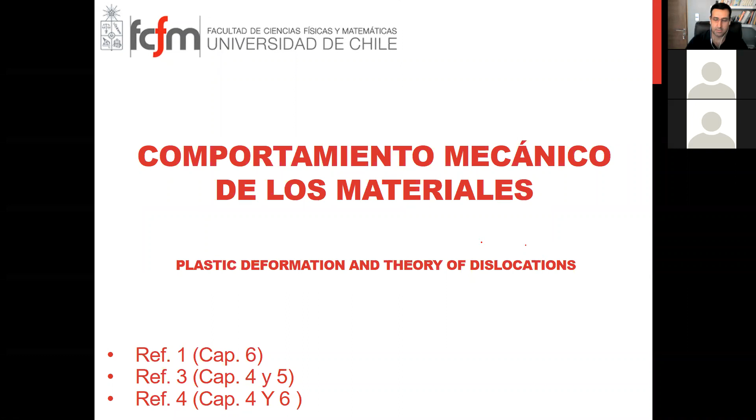In previous classes we talked about elastic behavior of materials, linear elasticity, viscoelasticity, ferroelasticity. We discussed reversible modes of deformation in materials that can be time dependent or time independent.

Today we start talking about irreversible deformations in materials, very easily seen in metallic materials and also in polymers. When we apply load to such materials, we deform them, and this deforming at low loads is elastic. After critical stress, which we call yield stress, materials start to deform plastically. It means after releasing or unloading the load, the deformation will not come back to the original. We know this as plastic deformation, and we want to study it in metallic materials today.

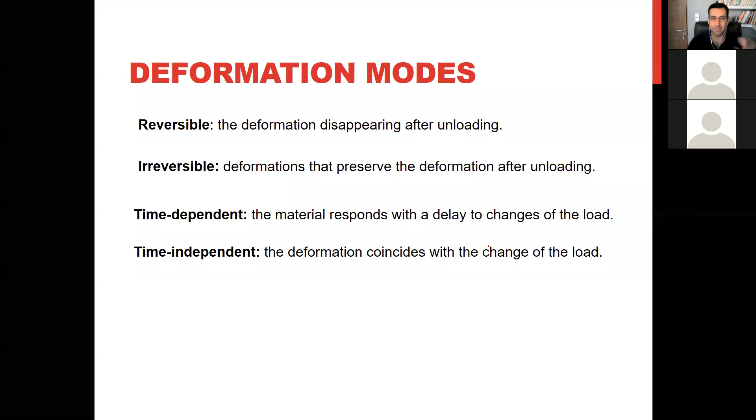What is the reason, and all the details from a microstructural point of view, why we have plastic deformation, and we see it in different aspects? Also, we have this plastic deformation in polymers, where we call it viscoplastic. Even we can see some plastic deformation in ceramic materials. These topics, or a little more about metallic materials, will continue in next classes after control one. So let's talk about plastic deformation in metallic materials today.

So we are focused on metallic materials. You already know well that metallic materials are crystals, and the majority are BCC, FCC, and HCP crystals.

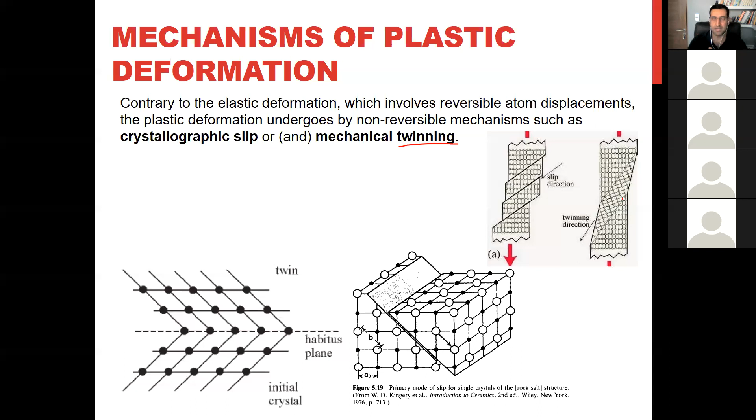First, let me explain. But twin doesn't have the same force orientation, right?

Look, for example, if you have a single crystal and you are applying load in this direction, if something like this happens, its mechanism is slip. If something like this happens, it means the mechanism is twinning, not slip. The mechanism is different.

Now I will explain what twinning is, and later in today's class we will talk more about slip. Let's briefly talk about twinning first, because it's a less important mechanism for plastic deformation, but since it happens, we have to be familiar with it.

If you apply load to a metal, you can activate both of these mechanisms. The slip is happening more frequently and more easily, so we see it more. But in some metals, like tin, we see this mechanism, which is twinning.

Twinning is something like a movement of a portion of the crystal in such a way that it makes a habitus plane here, and you can see it like a mirror. Atoms become like a mirror around this plane. This deformation happening this way, we call it twinning, and we see it in some metals, sometimes with sound.

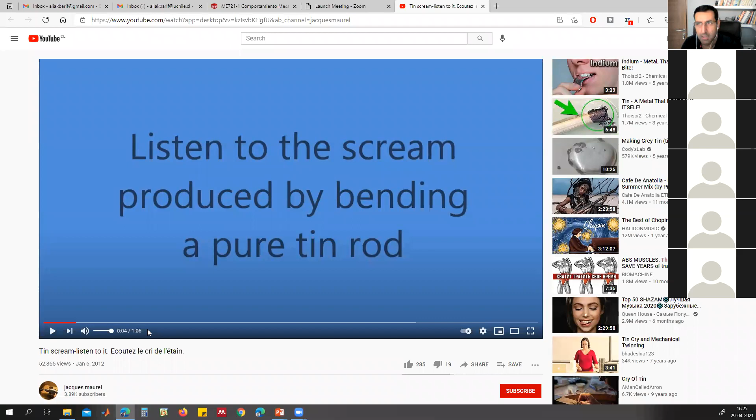This phenomenon is called the tin cry or tin scream. Tin is a metal where twinning deformation happens more easily than in other metals. And when this happens, the sound is coming out.

Look, you listen. Yes, yes, this is tin cry or tin scream.

This deformation or plastic deformation in this metal is driven by this mechanism, and happens in these metals. Other metals can also have it, but this is very famous as the tin cry.

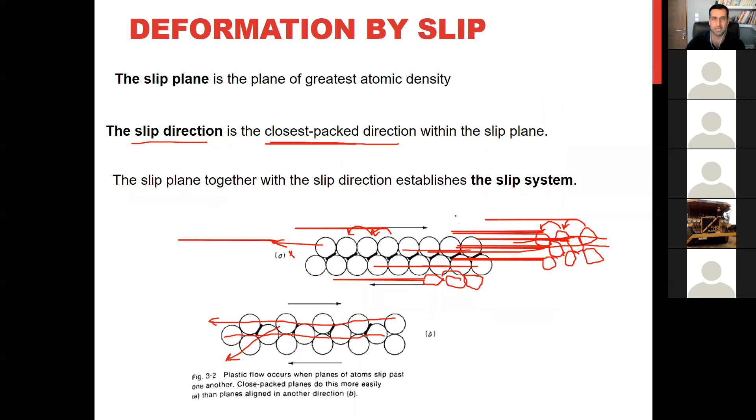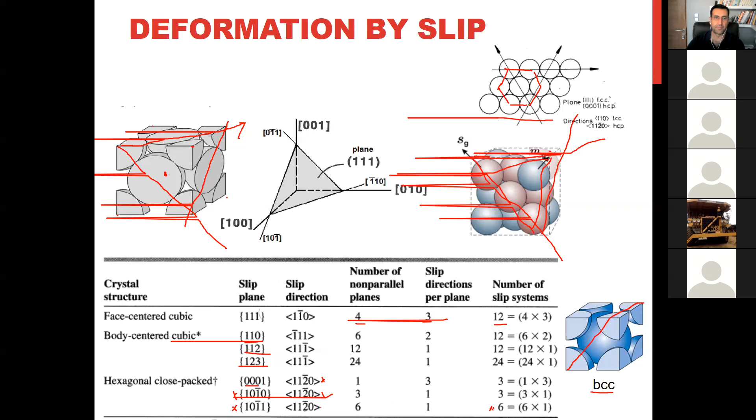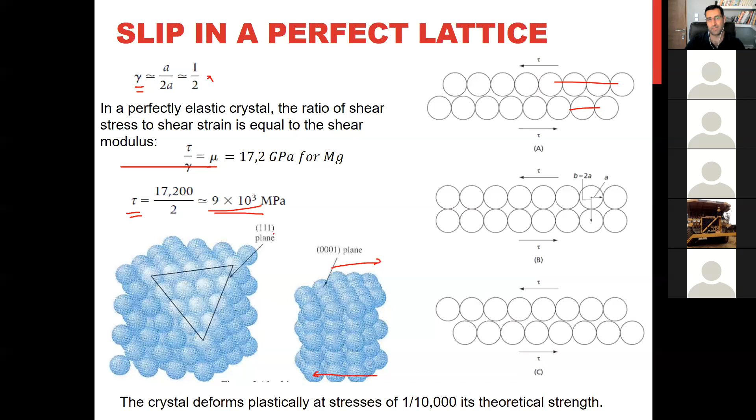It means applying shear stress in this way - theoretically, for this movement of two planes of this crystal, you need theoretically 10,000 megapascals. That is much more than what we actually see, which is about 1 megapascal.

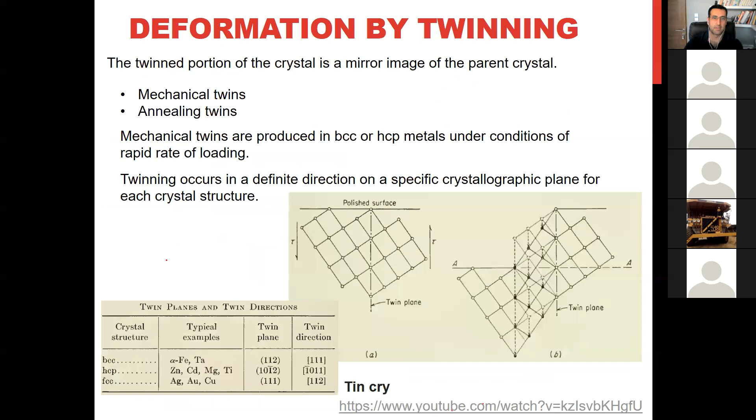So just keep in mind that slip happens by shear stress. The shear stress needed to move two planes on each other is much more than that needed practically.

Before talking about this discrepancy between the practical and theoretical, let's talk about the angle. Do you remember we talked about putting the slip plane at 45 degrees to have maximum shear stress? Why this angle?

That's coming from Schmid's law: if you're applying a tensile load like this on a crystal, and this is your slip plane, if you apply load normal to this plane, nothing happens because you're applying tensile stress to the slip plane, and as your shear stress is zero, there is no slip.

Or if you apply this load parallel to the plane, which is a slip plane in this direction, again you cannot deform it by slip because you are applying parallel to the plane, and these planes cannot slip on each other. So we must have an angle.

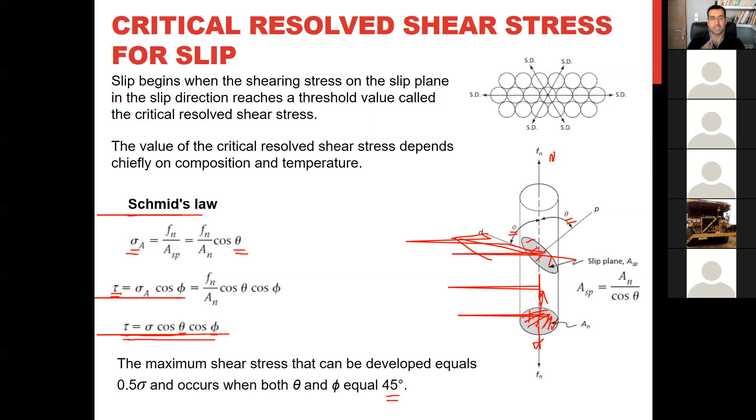You will see here, if you change these angles, the minimum will be at theta equals 45. If you change it, you need higher tensile stress to reach the shear stress needed for a slip. This is the reason why this angle matters and why we see these slip planes at this angle on the surface of the sample.

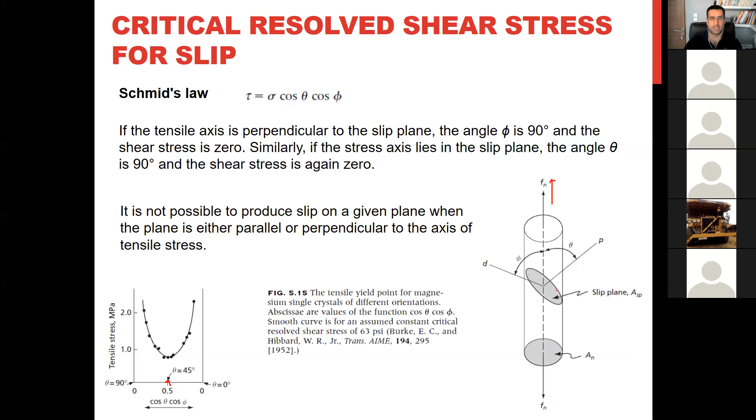So let's come back to this test to understand the behavior of materials. By this knowledge, we now know that this part is elastic, which is the separation of atoms that are like a spring, connected together by bonds. When we apply load, we are separating the atoms through attraction and repulsion forces between them. If we release the load, they come back to their original place, and that is elastic.

But when we increase the load or tensile stress, this tensile stress depends on the angle—here for this case, the slip plane is at 45 degrees to the direction of the tensile load, so the shear stress is maximum. At this stress, for example, plastic deformation starts.

It means one of these planes—we have lots of these planes inside the material—in one of them, slip can happen. Not necessarily in just one, it can happen in several. When this slip happens, some steps appear on the surface. We call it a slip line, and we can see it on the surface of the sample.

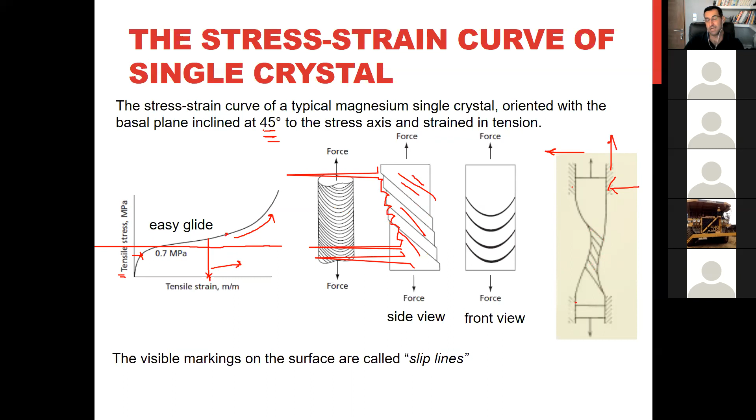When you have deformation and you are making a step here, the sample cannot stay rigid or keep this angle if you are making these steps. This part of the sample will lose this angle. As we saw in previous slides, if you change this angle, you need higher tensile stress to reach the critical shear stress needed for the slip. And this happens here, so the angle is no longer 45 degrees, the material starts to increase, the curve starts to increase, and the slope will change.

That is because of the way we are doing the test. If you have a machine where you can adjust the position of these fixtures, maybe you can continue deforming the material without this effect, okay?

So we answered several questions by now. Another question you have to answer is: if we calculate the shear stress or tensile stress needed to deform the material plastically by a slip is about 10,000 megapascal, why does magnesium start to deform at just 1 megapascal in this condition?

Before answering this question, another thing I want to explain is equivalent slip systems—it means when we have more than one slip system in a material. In the previous tests we talked about magnesium and the basal plane, the only plane inside HCP, and all of them are parallel, with a close-packed structure. So if you put that plane at 45 degrees toward the tensile stress you are applying, you can have easy glide in this plane.

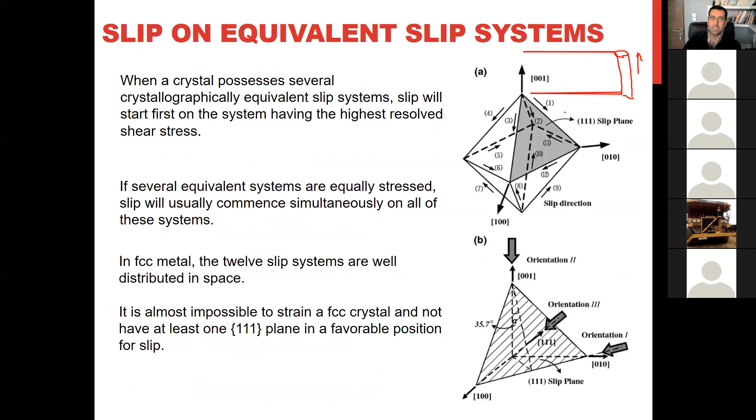This is why it's different than, for example, magnesium. When we are applying load in a direction that activates several slip systems, they interact with each other, and something happens inside the material that makes more deformation more difficult. This brings us another question: what is happening inside of the material when we have several slip systems activated?

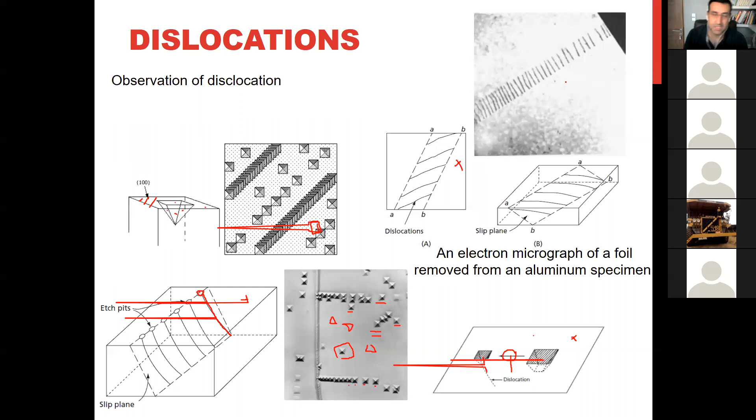This is a three-dimensional structure that we see, but as we take a photo, we are seeing it as two-dimensional, like this. So inside of the material we have some defects, which are dislocations, and these dislocations help metallic material undergo plastic deformation.

How? Like this. If you have a dislocation - I won't go into the definition of dislocation because I know all of you already know about it, so I can go faster here. If you have dislocations in a metal, when you apply shear stress like this, you have a dislocation here. Instead of moving all the upper parts of this crystal together, which means breaking all these bonds, you just move this extra plane that you have, like the movement of a caterpillar. When you move it like this, you need less stress, less shear stress.

So movement of dislocation inside the metal helps plastic deformation, and that's why metallic material deforms plastically very easily, because we have dislocations inside these metals, and they move easily with low stress needed for movement. You already know we have two types of dislocation: this is an edge dislocation, and another type is a screw dislocation, which is like this. So we have to be familiar with this topic, dislocations.

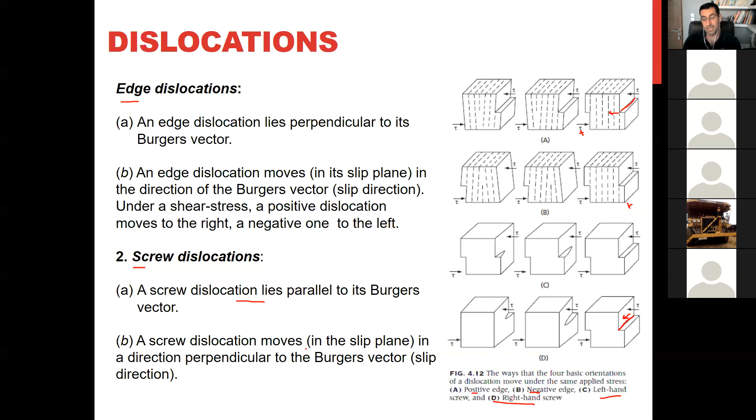When you have a dislocation in a metal, it means one part of the metal is slipped or deformed, and the other side of this dislocation so far is not slipped or deformed. So the dislocation line always divides the crystal into a deformed part and an undeformed part. And as it is, we cannot finish a dislocation line inside of the crystal—it means the dislocation must reach the surface, it cannot end inside.

So inside the metal, when we have dislocations that are not reaching the surface, they must form a loop, like this. When you have a loop, it means this part is deformed and around it is not deformed. And when you have a loop, if, for example, the Burgers vector is in this direction, and this is the slip plane and this is the Burgers vector of this dislocation, then this dislocation is edge in one part, and screw in other parts.

So a dislocation loop always consists of screw and edge dislocation. Some part, depending on the direction of the Burgers vector, is screw, and another part is edge dislocation. And another part is a mix of both, where we have a transition from screw to edge.

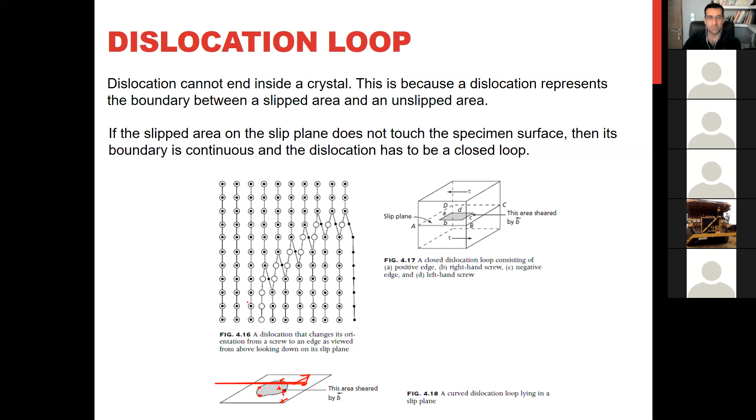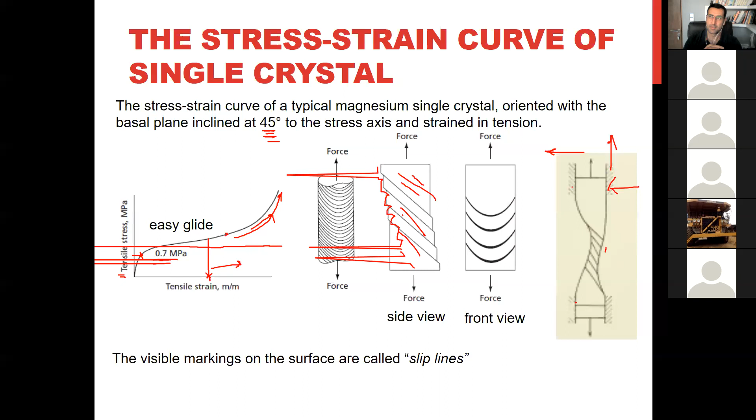But now I have another question, because that is shear stress, and dislocations you always show with compression, like compression stress. No, it's shear stress, it's not compression. Good, ah yeah, okay.

Also, if this is a shear stress, it means you are applying a stress on the lower part of this crystal in this direction, and the upper part in this direction. So exactly where we have dislocation, we have shear stress. Yeah, perfect, it's not possible by compression or by tension to move a dislocation.

Actually, that is possible, but the mechanism is not slip. We call it climb, and that happens when we are at very high temperature. When we reach that part of the class we are talking about creep, I will show you how tension or compression can move a dislocation. But the mechanism is not slip, it's something else. It's climb, we call it.

That happens because of the diffusion of atoms, not by a stress you are applying on the dislocation that breaks the bonds. That is another story, later we will talk about it. But we don't have movement of dislocation with compression and tension, it must happen by shear.

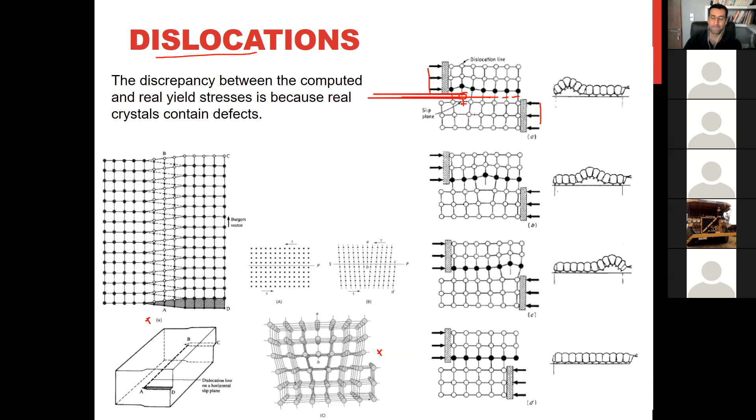So we are here, and we know the notation of the Burgers vectors for dislocations in different metals. We have different dislocations with different notation in different directions because they are in different slip systems.

Now let's talk about dislocations in FCC lattice, like aluminum, silver, gold, copper - those metals that we can easily deform. Let's go inside of them to see what happens. One question raised is: why, if we have pure aluminum and pure copper, both FCC, do we need different levels of stress for deformation and movement of dislocations? I'll explain this in the next class, but now let's see the details of dislocations in general in FCCs.

Look, so this is FCC. This is a slip plane, and these are slip directions, and these also, and these are slip directions. So if we look from upward, we will see something like this. If we have a dislocation, it means we have something like this here - this is a dislocation, this part.

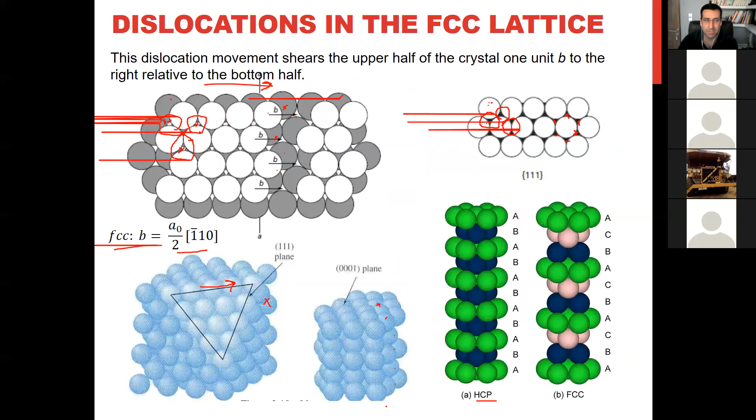You know, when you have a dislocation inside of the metal like this, let's come back to the schematic. This is a problem when you don't have whiteboards and you cannot draw whatever you want.

Look, here we have a dislocation - this is a positive dislocation here, this is the core of this dislocation. It means we have an extra plane here, and here we don't have. So the bonds beneath this dislocation are under tension, and here under compression. So in these parts, around up, we have compression strain.

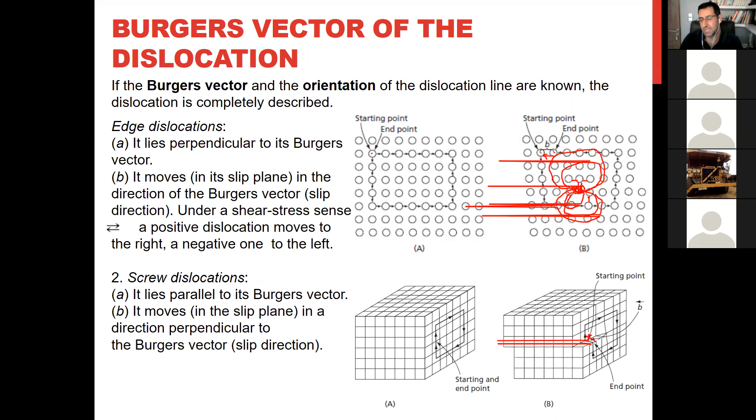In the downward direction we have tension, and this tension is related to the distance, how far we are from the dislocation. So in general, around the dislocation we have stored energy, elastic or strain energy. We can calculate this energy, and this is the energy of dislocation. You can calculate the energy of the edge dislocation.

This is the formula for edge dislocation, and this is for screw dislocation with its formula. I'm not going into details of how we calculate these; you can find the details in the reference books I presented. But something important and easy to use is that the energy of the dislocation is related to the square of the Burgers vector.

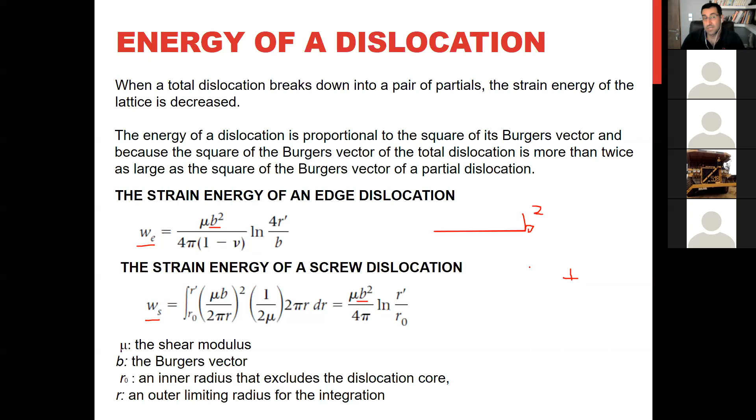So if you calculate B squared for each dislocation, you can relate it to the strain energy of the dislocation. So when we have this decomposition, you calculate B1 squared and B2 squared. If the sum of these two is less than the original, this decomposition can happen easily. If it's exactly equal, this is also true, and you can calculate it.

This can also be a question for you: we have lots of partial dislocations, and you can evaluate if a dislocation can decompose into two partial dislocations or not. If this equation becomes positive, it means it's not favorable. If it's negative, it means it is favorable.

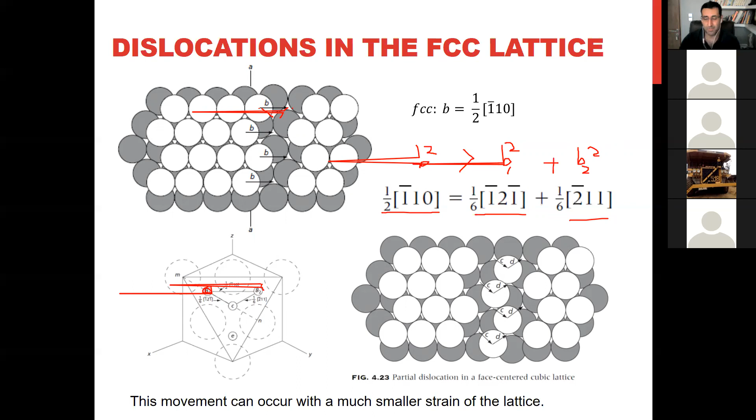So here we have two partial dislocations in an FCC crystal that make a stacking fault, and the schematic is like this. These two partial dislocations are separated by some distance. How many atoms or planes are between these two partials? This separation can be very narrow, or it can be wide, depending on two factors, and it's different for different metals.

One factor is the repulsive energy that these dislocations have. They want to escape from each other, so we have a repulsive force between these two partial dislocations that separates them from each other.

Another factor playing here is the surface energy. This stacking fault is a defect inside the metal, so it increases the surface energy, or the energy of that plane. So the balance of these two energies, the stacking fault energy and the repulsive energy of the two dislocations, defines how much these two partial dislocations can be separated or how close they stay to each other.

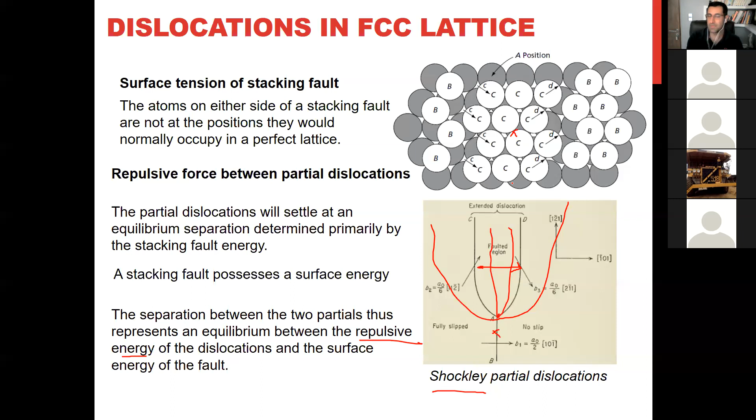This affects the behavior of the material, because in some conditions the partials must come together and recombine into a single dislocation to help deformation continue. If they are too separated, for example, this is more difficult. So when different FCC metals have different stacking fault energy and repulsive energy, the behavior of these different metals is also different.

Now we just learned about the partial dislocations in FCC metals that help deformation, but there is also another type of partial dislocation in FCC metals. The ones we already discussed that can move and help deformation of the metal we call glissile dislocations. The other type of partial dislocation we have is called Frank partial dislocations.

The schematic is like this: when you have a dislocation here, and this is the dislocation, the Burgers vector is perpendicular to this slip plane. It means in this direction the Burgers vector is not inside the slip plane, so this partial dislocation cannot move.

If you have such a partial dislocation inside the metal, we call it a sessile dislocation, and another name for it is the Cottrell-Lomer barrier. So not necessarily can all dislocations move - sometimes a dislocation decomposes into partial dislocations that are sessile dislocations, and they cannot move.

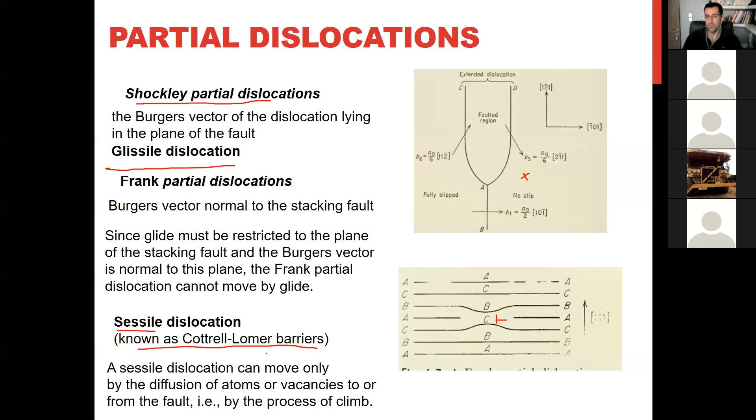Another thing happens inside metals like FCC. In FCC we have 12 slip systems, for example 4 slip planes that make angles with each other like this. If we have a dislocation in this plane and a dislocation in that plane, and both are activated or moving, in some places they come to intersect.

So dislocations, when they intersect with each other, cannot cut each other. For example, if this is a dislocation loop inside a metal and another dislocation from a different plane comes here, when they intersect, these steps will form.

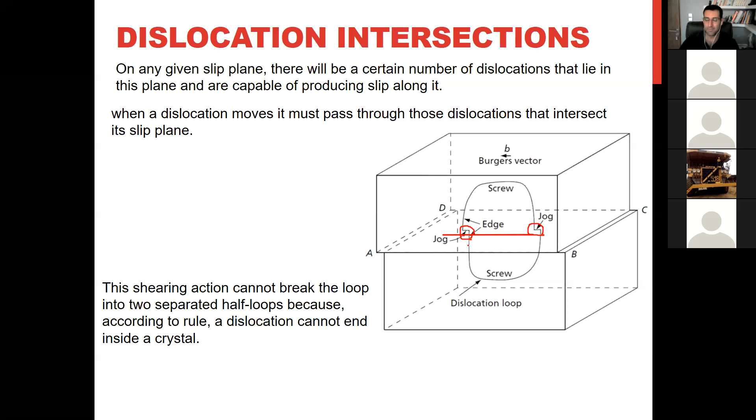And we cannot cut this loop, because we cannot end a dislocation inside of the metal. So this cutting, or these steps, can be in two conditions. One we call it kink. They are kink.

Kink means this step that is formed lies in the slip plane of the dislocation, is inside of the slip plane. It means this is the plane and this step on the dislocation is inside of the slip plane. Can be edge or can be a screw, depending on the direction of the Burgers vectors. You'll see.

Elimination of this kind of kink is very easy. Just if this dislocation moves, this step will be eliminated.

Another type of step that can form is jog. We call it jog. When the step is not inside of the plane, the slip plane of the step is different than the slip plane. Like this, you'll see, the slip plane was this, or is this, but this dislocation is here. It means that the slip plane is different.

In this condition, if for example you are applying a stress in this direction, this dislocation moves, this jog also moves, because the Burgers vector is inside of this slip plane, so it can move. It's not a...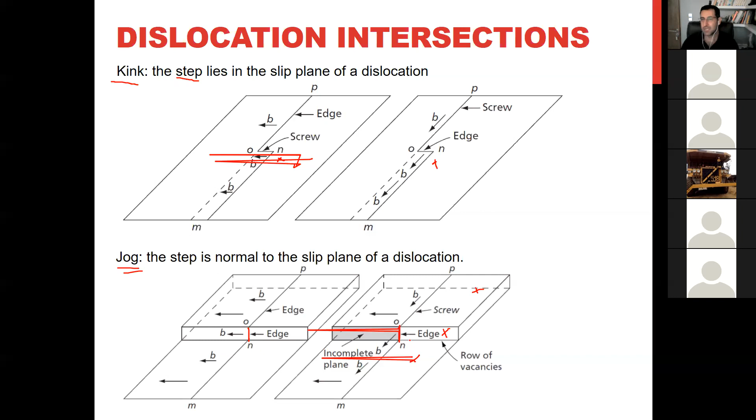Another thing, before explaining this, you know, even in a very full annealed metal, we have dislocations. It's very difficult to have a metal without dislocations. And we quantify the quantity of dislocations by density.

Later I will explain it, but here I want to make a question that helps you understand this slide. If, for example, we have a certain quantity of dislocation in a metal and we start to deform it, obviously some of these dislocations which are inside of the metal come to the surface and they escape.

So the density must decrease after deformation, not increase. Because finally, if you have positive dislocations and negative dislocations, if they come to each other, they can cancel each other. So this is elimination of dislocation. So the density of dislocation must decrease by plastic deformation, not increase.

But actually, we see in metals, when we deform a metal, the quantity of dislocation rises. It means, for example, if you have 10 to the power 6 dislocations per square centimeter, this will reach 10 to the power 12, something like that, okay? It means the quantity of dislocation increased.

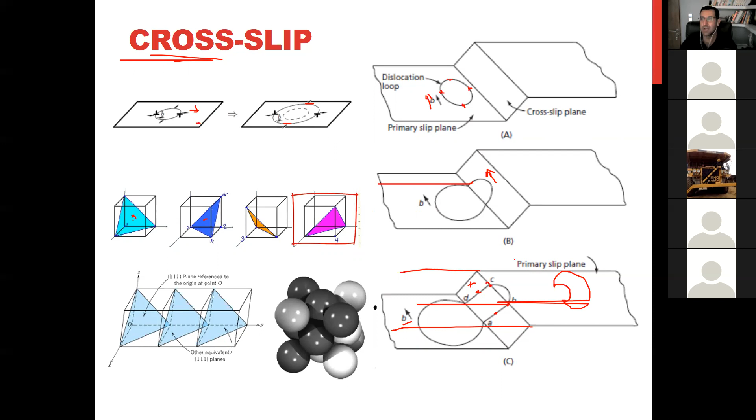It means by plastic deformation, by having such sources, we are generating more dislocations. That's why the concentration of dislocations increases by plastic deformation. Is it clear? Yes. Good.

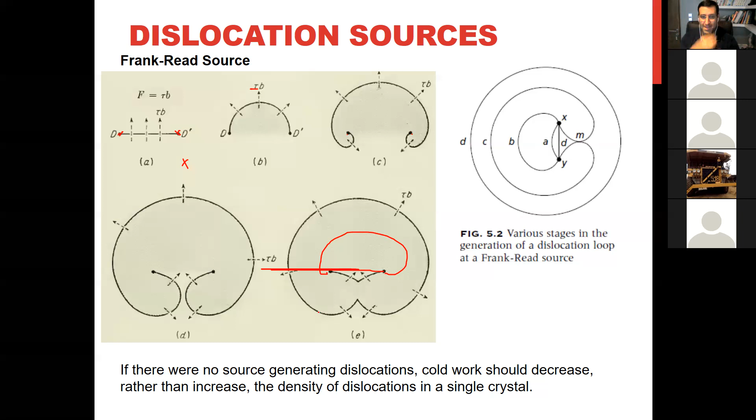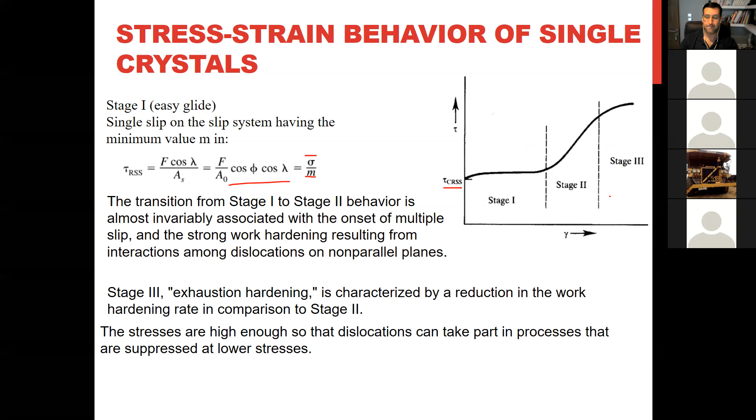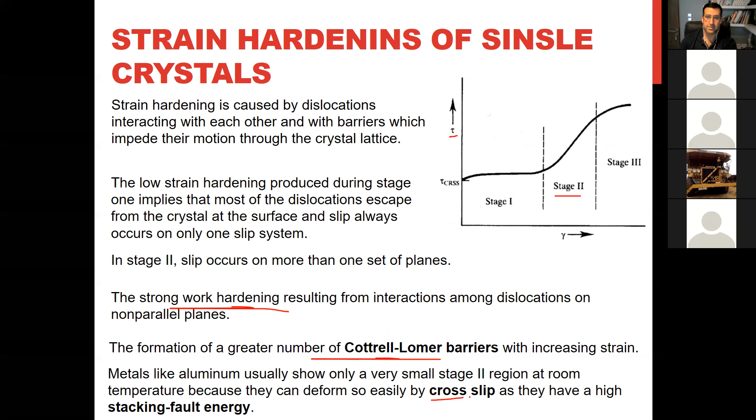So this is just extra explanation for this, you can easily read it later. That's you explaining stage 2, that is barriers, Lomer-Cottrell barriers. For increasing the strain, more stress is needed, and the strain hardening is happening, and cross slips happen inside of the metals.

That was FCC. In HCP also we have the same, as this basal plane has a similar configuration. Deformation also can happen by partial dislocations, and the decomposition of the dislocation for HCP is like this, becoming two partial dislocations. The same way, you can calculate the energy of each dislocation and understand that the sum of these two is less than this, so this decomposition can happen easily.

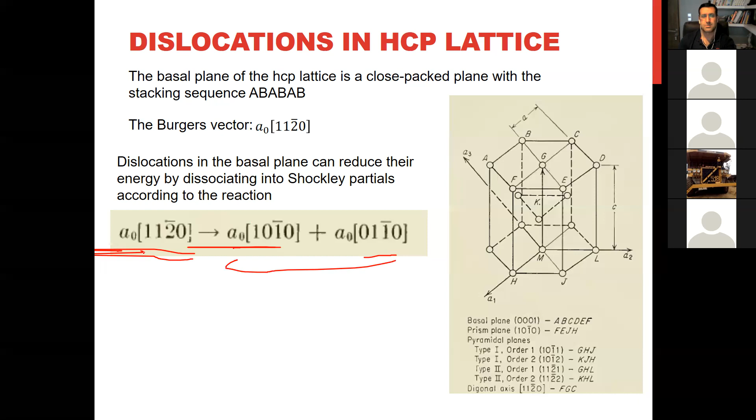This HCP dislocation, they don't have much more that we can talk about. And dislocation sources also we talked about.

Now you understand why we report the density of dislocations by square centimeter, because you can count it on the surface of that sample. For example, this is the annealed one, and the number of dislocations we can count in an area, so the dislocation density becomes the number of dislocations per square centimeter.

When metal is annealed, this density is about this quantity, but when you do cold working, we are increasing the density of dislocations by, as I explained, activating some source, like a Frank-Read source, for generating more dislocations.

In some metals it's not easy, we call them whiskers. Whiskers are very tiny metals that we can fabricate by melt spinning or some special method like from vapor phases. That type of metal can be dislocation free, or they don't have dislocations.

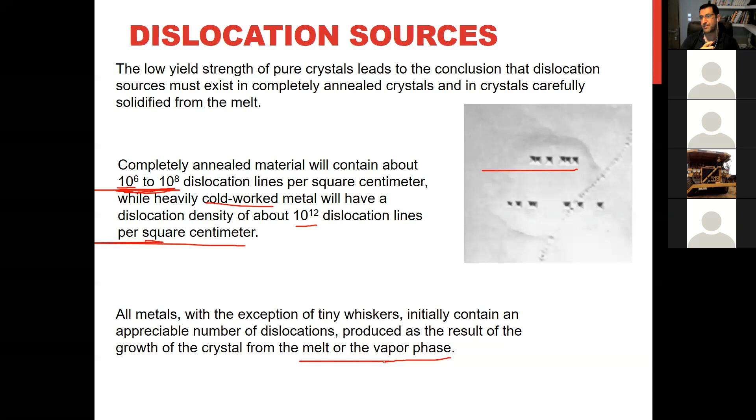Sir, in general applications, we don't have a single crystal, or do we? For example, in engineering, we don't have a metal as a single crystal, or yes we do? In several applications we have to make single crystals. For example, one simple one that I also explained is turbine blades. To make turbine blades, you can solidify that turbine just having one nuclei, and this nuclei is limited, with directional solidification, so the turbine can be a single crystal. Making a single crystal is not difficult, and it doesn't have relation with this topic, because inside of a single crystal we also have dislocations.

I thought that a single crystal was an application only in labs or experiments. No, no, we can make single crystals and it's not actually too difficult to make a single crystal. Thanks. More questions?